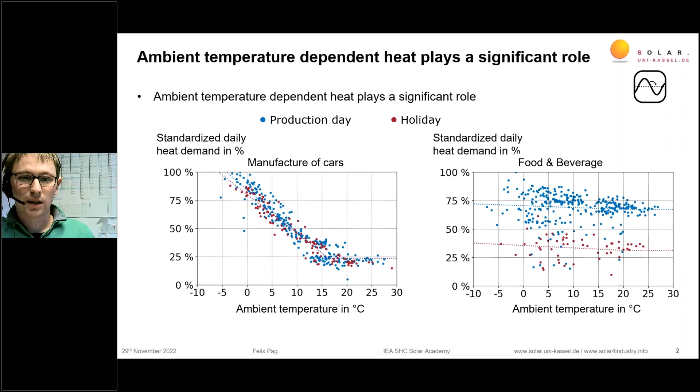In Subtask A, we did some more work on that, and we did a cluster analysis of more than 500 heat load profiles. Unfortunately, these profiles are mainly from Germany. We think that the basic results can be transferred also to other regions throughout the world, at least in those regions where we also have a seasonal behavior of the ambient temperature. And here in this diagram, you can now see the results of this cluster analysis. So we have in blue these profiles which are very non-seasonal and flat throughout the year. And for different industries, you can see how the heat demand is really changing with the ambient temperature.

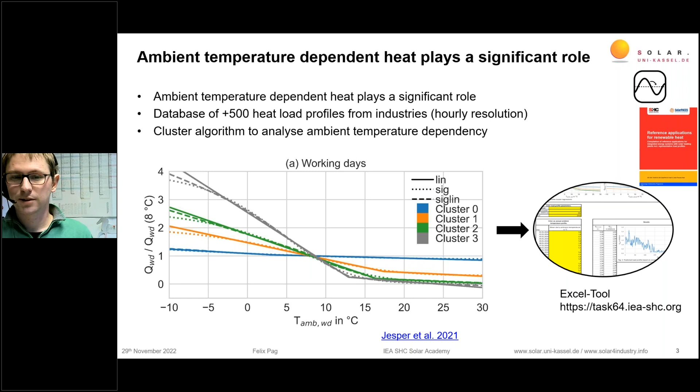More information on that, because we think it is very important for future system design, you can find in this deliverable shown here, the reference applications for renewable heat, which is published on the task website. And there you can also find an Excel tool where you can make your own heat load profiles. So I have already shown on the last slide this strong dependency of these heat demand clusters on the ambient temperature.

And here in this picture, you can see the combination of the clusters and different sectors, and how the different clusters are distributed within these sectors. So to give an example, again here, the manufacture of beverages. At the bottom here, we have in all our profiles that we had, that all these companies were collected in this cluster 0.

So in these clusters we don't see any seasonal behavior, and that is very different in some other sectors. For example, in the manufacture of computer, electronic, and optical products, where we see more processes which are related to the ambient temperature, for example. Basically, this is very often space heating, but also very important are big ventilation units, which are often underestimated in their importance for the industrial heat demand.

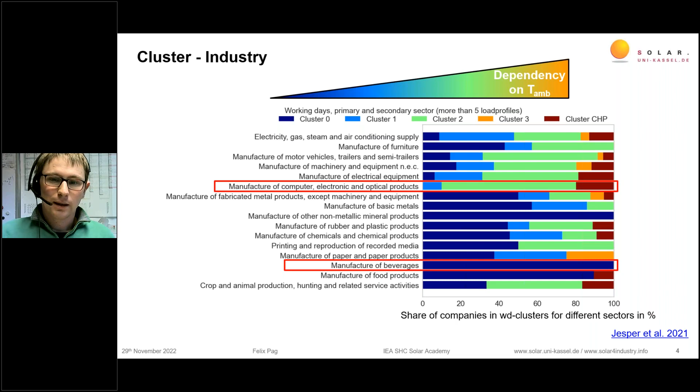One other thing that we took a look at in the subtask was the importance or the availability of roof area for solar collectors. Very often in potential studies, we found that the availability of roof areas is a limiting factor, but so far we could not quantify it. Based on the database that we had, we could make an analysis with GIS data from OpenStreetMap and analyze how often the roof area is really a limiting factor, and what is the influence on the potential solar fraction that we could reach with these solar collectors.

And the results you can see here in this diagram. So on the y-axis, you can see the required collector area based on the summer heat demand. So the solar system design is always made in a way to really meet the summer heat demand and not to produce too much excess heat in summer. And on the x-axis, you can see the flat roof area that we find based on the GIS data. One dot is always representing one of the companies in our database.

And in all cases where the company-specific dot here is below these lines, then you know that the roof area is big enough to install that much solar collector area to really meet the summer heat demand. And the good news is that only 40% of the companies that we had in our database had a too small roof area to install enough solar collectors. So basically, this is quite a good result, as 60% had enough roof area.

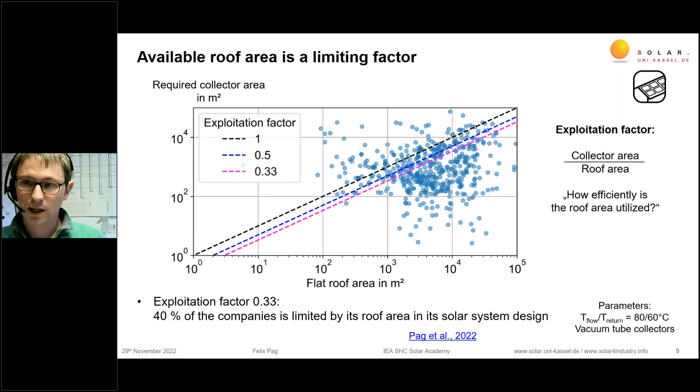Nonetheless, it also underlines the importance of having in mind already during the installation of new industrial areas that you perhaps need enough additional areas to install solar collectors.

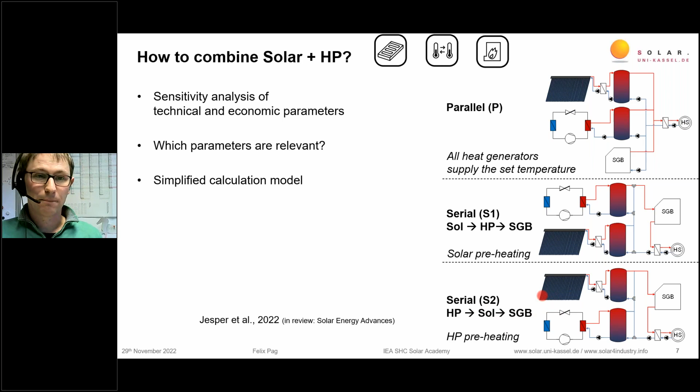And we wanted to find out which are really the basic parameters that are influencing our system design or our economics. And I cannot go into all details, but I want to show you one slide which is kind of summarizing what we did and which is going to be published soon, hopefully in a Solar Energy Advances paper. Here you can see in all these diagrams the levelized cost over 20 years for the different system combinations of solar and heat pumps, and some parameters that are less important here at the top.

So the location, the hydraulic concept, and also the annual load profile type are not that important for the economics of the system. Of course, you have different system designs and different solar fractions that you can reach, or renewable fractions, but for the overall economics, it really does not make too much of a difference. But here are three other parameters that are really having an impact on the levelized costs.

And on the one hand, this is a daily load profile. So is the heat demand throughout the day more or less constant, or do we see a peak during noon, or at least during the day? That has an impact on the system design of the heat pump, and that you can see also here, shown by the heat pump capacity ratio, which is defined as the heat pump capacity divided by the maximum heat load, which we can see throughout the year.

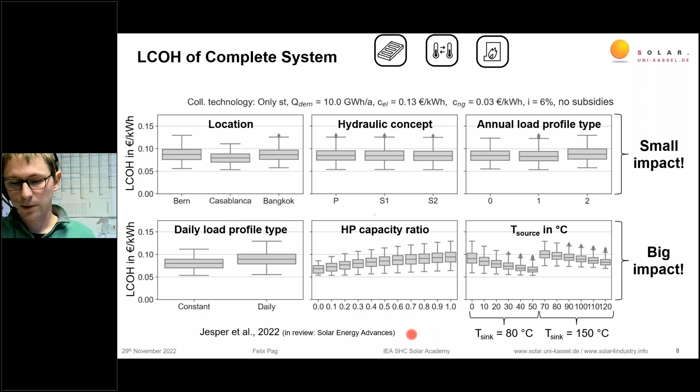And also quite clear, the source temperature for the heat pump has a relevant impact on the efficiency, and so also on the levelized cost of heat of the overall system. Again, if you're interested in more results on that, I invite you very much to have a look at this paper if it gets published soon.

So to summarize, heat load profiles in industry cannot be assumed to be constant, as this is done very much. It really depends on the location that you look at, and on the sector of the industry where you want to integrate solar collectors. But the good message is almost all companies have a relevant summer heat demand. So there's always a role, at least in minimum, to cover the summer heat demand.

Another conclusion, the roof area is a limiting factor for solar system design, but the majority of the companies really has enough roof area, and that is always the easiest option, not always the cheapest option, depending on the availability of other areas. But nonetheless, it's quite important to see that roof area is not a limiting factor for all companies.

And one really important result based on our subtask A results is that we need new design strategies for solar heating plants, especially in combination with other technologies, especially heat pumps, but also having in mind that the heat load profiles are very often not that constant. And so if we have the heat demand in winter or the transition times, but the solar yield in summer, we still have to see how to really better combine that to reach higher solar fractions or renewable fractions.

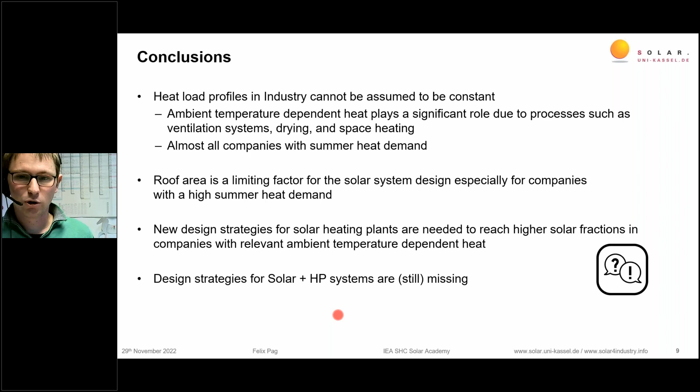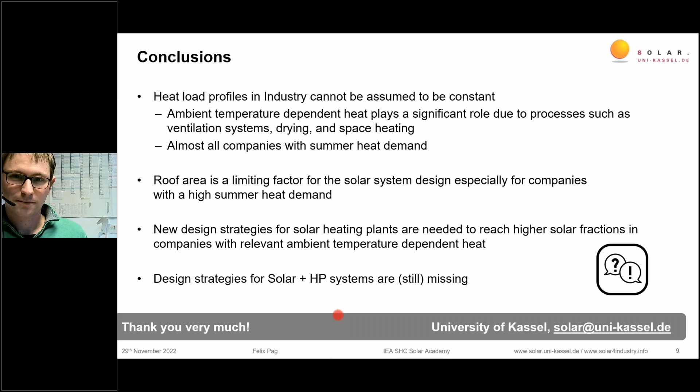Thanks. Yes, Felix, thank you very much. Very interesting. I think especially this hybrid combination, because we need to go to higher shares. So there will be always this offering of hybrid solutions in the future towards industry. Very interesting. So we will have all questions, as Felix said, at the end.

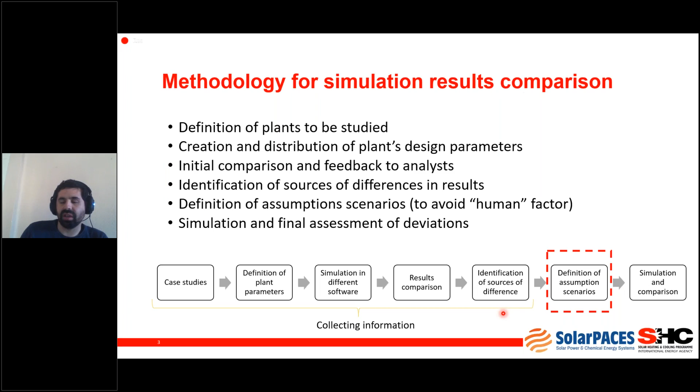We did that for all the case studies that I will present next, in order to understand how the technology impacts on it, how the load and the integration scheme also affect it. And from those results, we obtained the overall results. So it's a guideline that I will also show you. So for the comparative study, we had 4 case studies.

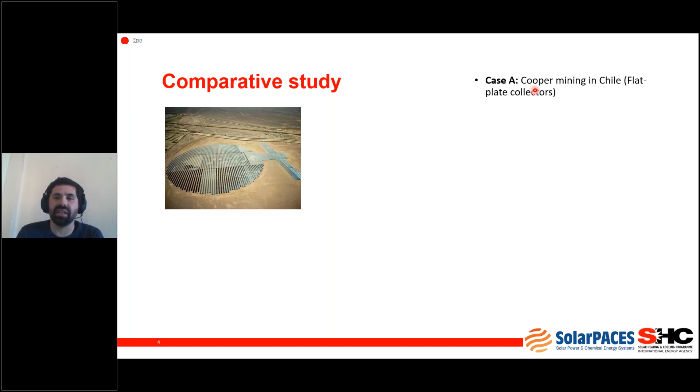The first one is a flat plate collector plant, fixed, and it supplies heat to a copper mine in Chile. This is the picture. The second case, it's a flat plate collector solar field also, but it has a one-axis tracking system to supply heat to a paper mill in France.

And even though it's a simple technology, it was not easy to model in all the available software because it's not common to have a non-concentrating solar thermal system with a tracking system. So it was also interesting to do this. This is a Fresnel collector to supply direct steam to a process also. And again, a different technology with different temperatures, and also storing steam is a challenge for many softwares.

And the last one, it's a parabolic trough that supplies heat to a dairy factory located in Switzerland. So the table here shows the software or tools that we analyzed for each of the cases. Of course, more tools are better, but it was not always possible, mainly because of limitations of some of them. In addition, we had, for example, for TRNSYS, which is a very

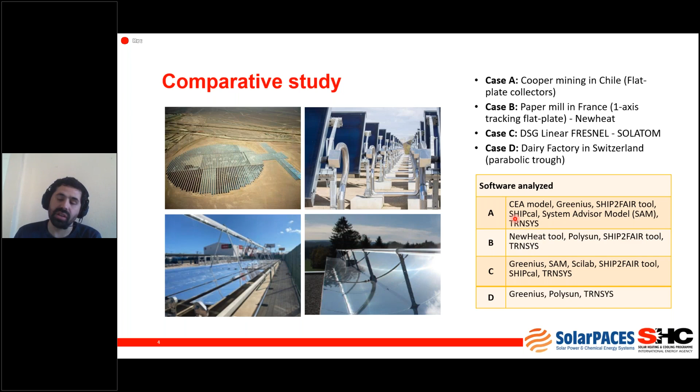you can make a very customized model. We had different results depending on different analysts. So we also could kind of assess the impact of the human, and we wanted to avoid that in the later stage.

So recently, the guideline, this is one of the tangible deliverables of the subtask. It's out, it's ready. So we have the draft version. In the next days should be the final one. It presents the methodology that we applied, the details of the case studies, like all the parameters that I mentioned, and also the integration scheme, which is also interesting, and it's important to know the differences in the technologies that are applied. We did the first assessment of the deviations that I just mentioned, and then we related them and

tried to list the most common assumptions and how they impact the energy yield. We also present for all the case studies the different scenarios of this induced error assessment. I will show an example just after this slide. And finally, some recommendations. These are just recommendations because SHIP plants are very customized to the client, so it's not possible to have very strict articles. It's better to have just some recommendations, and there's no standard nowadays.

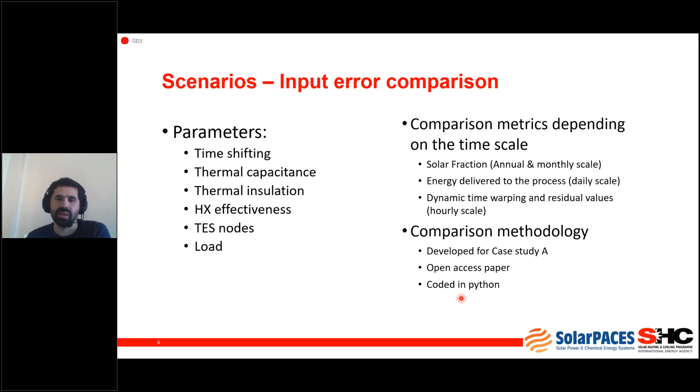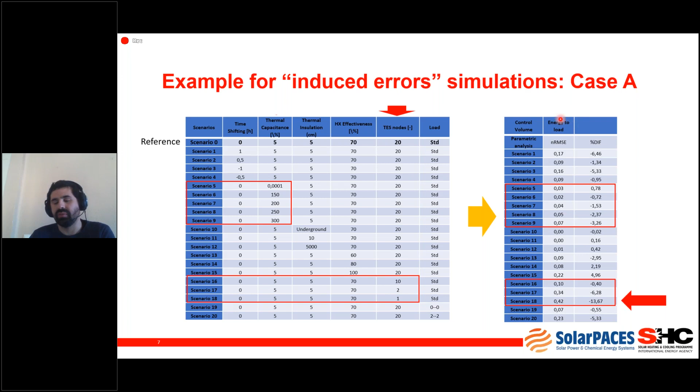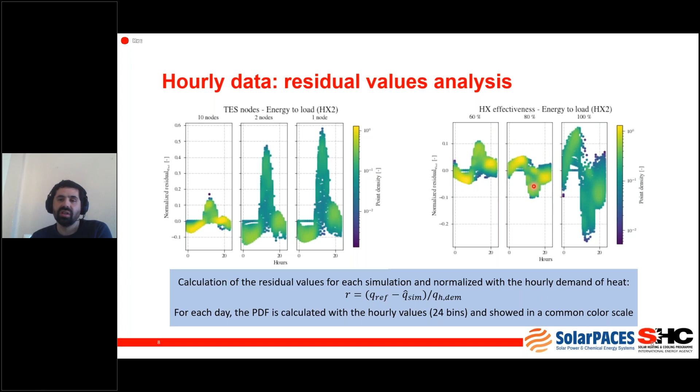So this analysis was also done for all the parameters that we observed, and it is also reported to understand or try to put more effort in those that you can see impact the most. For example, here also the effectiveness of the heat exchanger. It could depend on the parameters and also the technology.

An additional outcome of the work that we have done is to update a table. So this was one of the outcomes of Task 49. We took this. It's a list of available software to simulate solar thermal systems. We updated it. Of course, the software have improved in these years, and also they have more capabilities, so we can see, for example, some of the features of the software. They are sorted, and as I said, they are not ranked by which is the best one, but you could see more or less if it could be feasible to model your system in some of this software.

Well, this is a complete table. Of course, if you have any input, we are very open to get some feedback and to add more software. If you have one software, also to include it in this list.

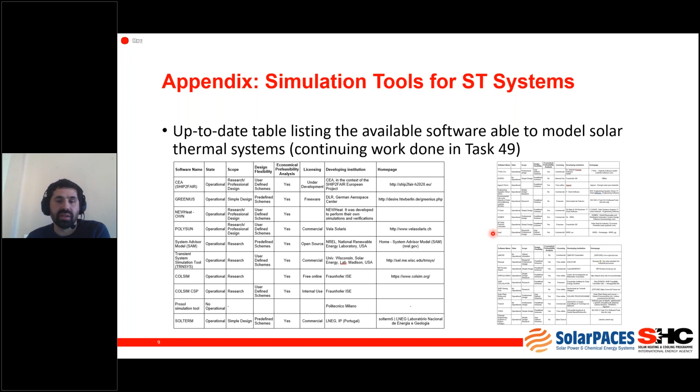Just the final remarks. I just want to invite you to participate in the second stage of the task, next year. We will be working on monitoring the solar thermal system during the operation stage. Most of the work done was during the design stage.

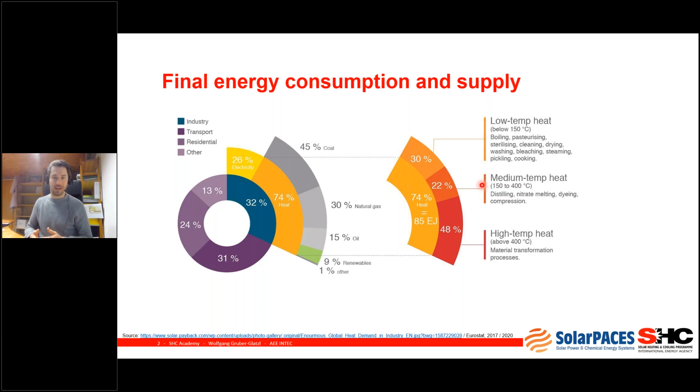I know some people that are joining know a bit more about solar thermal, some maybe don't know that much, but of course we can think of a lot of barriers, a lot of problems, a lot of challenges. But we wanted to focus in this task on the success factors for SHIP. So I want to present today some of these success factors on existing SHIP plants, what we have learned from our SHIP database, as Bärbel has mentioned, show you some data and examples, and see what kind of success factors we can derive from them.

So this is the link to our existing database, the URL ship-plants.info. You can see a screenshot of the map worldwide. More than 400 plants have been documented so far. You can filter for countries, operation time, industrial sector, unit operation, with which we mean the different processes that are targeted. You can filter by collector area, by collector type.

Also point of solar heat integration, which was an important work of the previous task on SHIP, Task 49. You can see here an example of the different integration schemes on supply level or on process level. And last but not least, you can also filter by solar thermal engineering companies, so those companies that actually carry out the successful implementations.

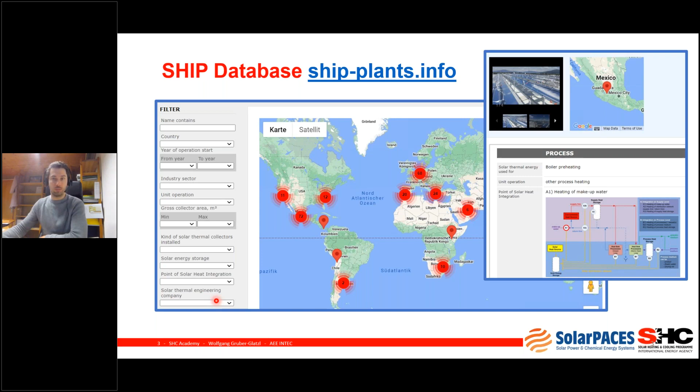This data from the SHIP database also goes directly into a publication that Bärbel mentioned at the very beginning, the Solar Heat Worldwide report, which is published by our institute. Werner Weiss is the main author, and I'm contributing the SHIP data. In March 2022, the last cutoff date, we had documented 394 plants worldwide. Fortunately, we could add a lot to the database in the meantime, so we are already looking towards the next publication in 2023. More than 1 million square meters of gross area have been documented.

Looking at this chart with different size categories, we see that only 3 plants are in the largest category, larger than 30,000 square meters of gross area. Many know that this is related to one plant that has 59% of the installed power of all SHIP plants: the GlassPoint system in Oman, which is huge in comparison to everything else. So all the statistics are a bit difficult to show, because one plant of these 394 has 59% of installed power. On the one hand, it dwarfs what is happening at the other plants. It also shows the huge potential if the right system is applied.

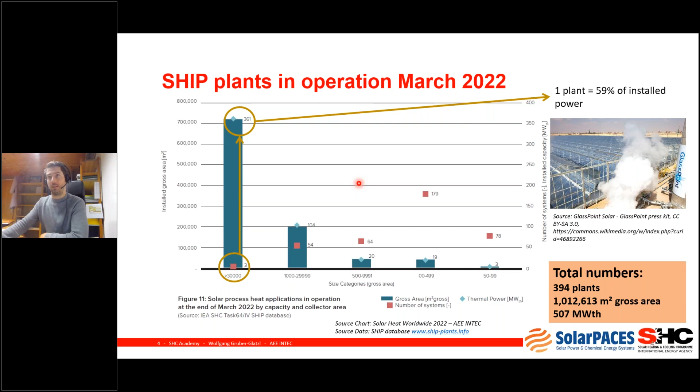But I also want to highlight that all the other plants are success stories, of course. And as Felix has shown, there are many plants with a lot of roof area available for solar thermal. But one success factor here, of course, was the turnkey solution. GlassPoint is delivering steam, not collectors, so it has not sold the collectors to the client, but rather it has sold the steam. So I want to highlight this turnkey solution as one success factor: selling heat, not collectors.

We are doing a lot of work with industries, not only about solar processes, but also heat recovery and these hybrid systems with heat pump solutions. And of course, for industries, long-term energy security has gotten increasingly important. So having a stable energy price is an increasingly important selling point for industrial clients. They are looking for safe energy supply.

Another example is the Maltery in Issoudun in France, which was implemented in 2021 by the collector manufacturer Savo Solar and the ESCO New Heat. New Heat is selling the heat to Boortmalt, which is the Maltery here. I'm very happy that this plant is realized. I was at this plant 4 years ago doing a feasibility study, and now it has been implemented. So I think it's a great success that this was possible. It's also one of the largest collector fields in Europe and worldwide for SHIP.

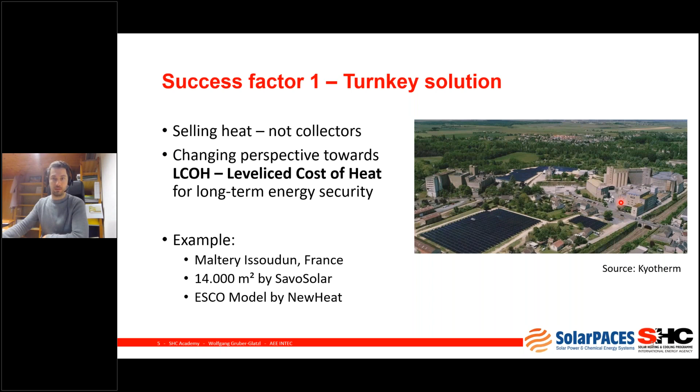So looking again at the perspective of the end users, they want to know if SHIP is a reliable solution, if it's a simple solution, and if they are the first one to implement, or if it has been done before. We are R&D and suppliers in this research task, and we can say yes, SHIP is reliable. It's also simple, one can argue; it's a simple technology that can be implemented, and there are experts that know how to do it. And no, it's not the first time it is implemented; it has been done before.

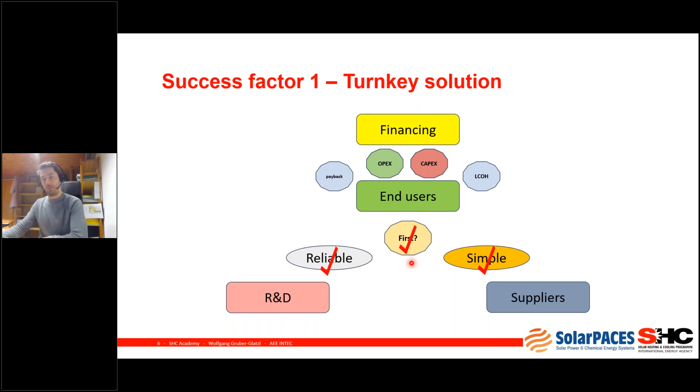Then the end user is looking at the financing, at the CAPEX and the OPEX costs. You can see that SHIP is rather cost intensive upfront, so very high CAPEX cost, but low OPEX cost. So we try to avoid looking at payback time, but rather look at levelized cost of heat, because this shows more the true cost of solar heat in industrial processes, especially if you can provide a turnkey solution.

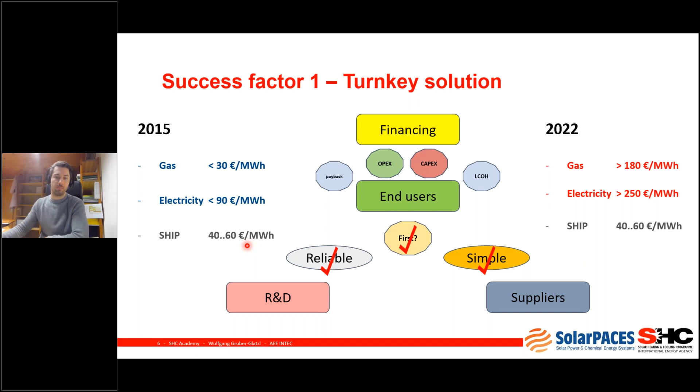What we have seen in this last year is more implementations of systems with higher collector temperatures. So Fresnel collectors, parabolic trough collectors, but also this example, vacuum flat plate collectors that can provide up to 180 degrees. We have seen multiple implementations there. There, the integration is simply easier. You can integrate on the supply line on the utility side of the industrial plant.

You're talking with the facility managers and not so much with the production managers that are dealing with the product processes. So it's much easier to actually integrate and cover a larger share of the heat demand, which is also reflected in the economy of scale. So you can install large systems.

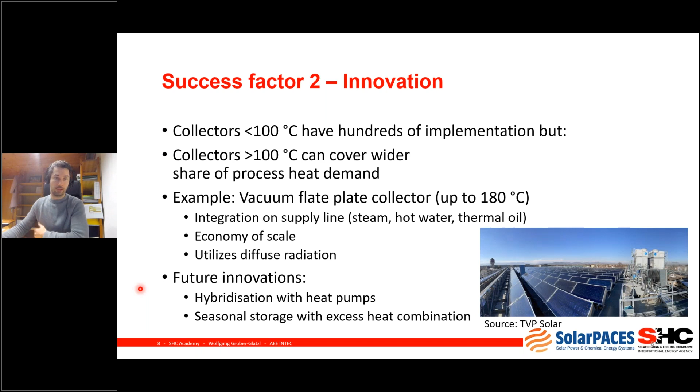But besides this, we can see that the food sector is also a very interesting industrial sector for solar heat in industrial processes. And we can see that some companies have really achieved a high number of implemented systems. So they have multiplied what they have done before. They have a high standardization in their workflow.

And here I want to highlight the success story in Mexico with basically two companies that are having the highest market shares there, and they are in competition. They have reduced planning costs because of doing similar integration schemes. Again, when we look at the integration concepts, a lot of integration on supply level at low temperatures was possible, with lower solar shares, and this is why also smaller systems, but still high standardization, high multiplication.

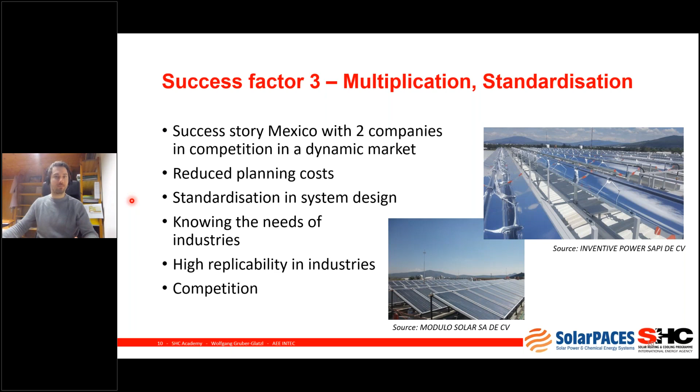I wanted to start with these three success stories, just a few examples to highlight this. And now going to what we are doing in Task 64. We have seen subtask A with Felix and subtask C with Alan. We from AEE together with Fraunhofer ISE are leading the guideline to market. So we really want to make sure to promote SHIP the right way, to promote it as a solution for the industry. This is the goal we have here.

So the big picture is addressing the relevant aspects and barriers, and placing SHIP as a core part of the hybrid industrial energy systems presented before, being a platform for researchers, technology suppliers, project developers, and end users. So today is a good chance to promote this again in the final year of the task. If you're interested in our activities, please contact us, and we can collaborate, which would be very interesting for our final deliverable, a position paper on SHIP. The more voices we can include there, the better it is to speak for everybody.

These three aspects I want to highlight: innovation, competitiveness, and financing options. This is also reflected by the three success factors I've mentioned. So innovation is still necessary. SHIP is a technology that can be implemented, as is shown in the SHIP database. Competitiveness is important. And increasingly looking at financing options. So those were just a few examples.